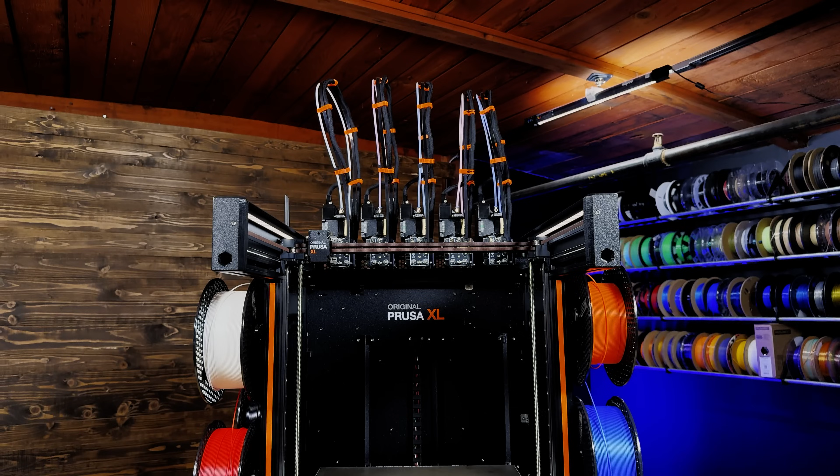This is the Prusa XL, a monstrous 5-tooled machine with an equally monstrous price tag. Is it worth it? Let's find out. First, I want to let you know I bought this machine.

It's finally Friday. It's finally a beautiful Friday.

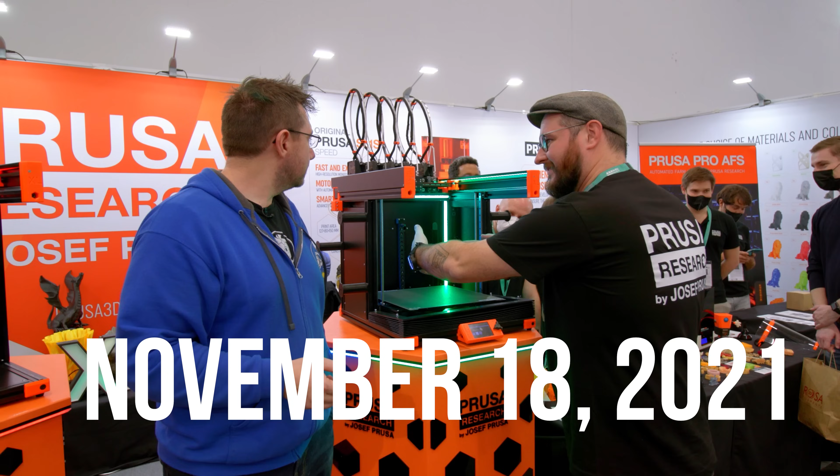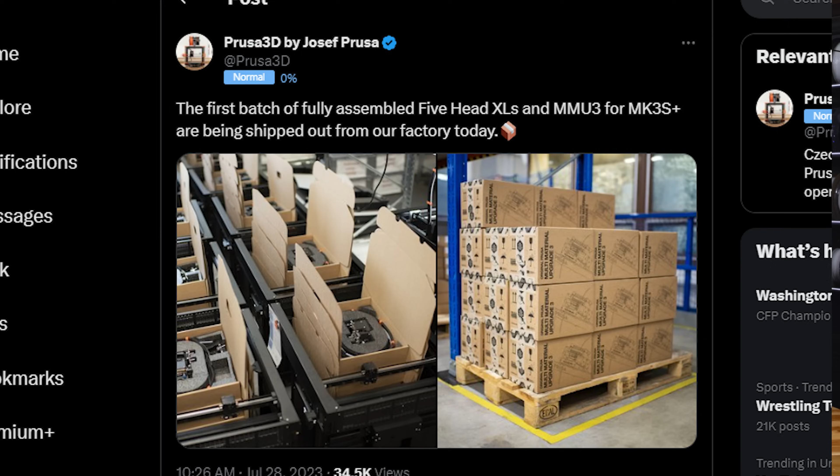I was one of the pre-orders when the Prusa XL was announced, November 18th, 2021, so many years ago. And then the wait. One eternity later. And then the shipping announcements. There's actually a tweet. He talked about the shipping announcements because it was right around the time that the LTX Expo was happening in Vancouver, Canada, with the 5-headed Prusa XL now shipping, and me being someone who put forth $4,000 to pay for the 5-headed machine.

I thought, the 5-headed machine I've paid for will be within driving distance of my house. Why don't I just propose taking the one from LTX as my pre-order? I shot my shot. There's no one guarding the Prusa booth. There's no one guarding the 5-headed XL. So I have an idea. I'm gonna steal it. And then this happened. Remember when I talked about stealing that?

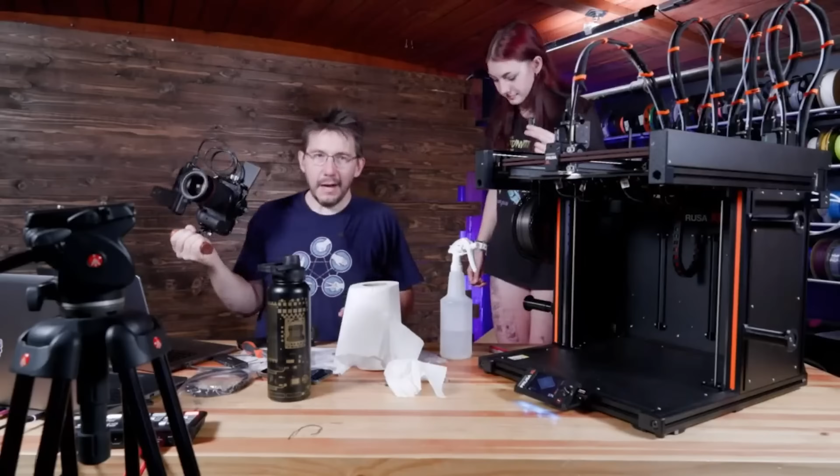And I thought I needed a good excuse to get it out of the box. And it was my birthday. So what I did is what anybody in my position would do: have a freaking birthday stream getting the XL out of the box and hopefully printing its first print for me. I think at this point we're gonna call it good because we've taken it out of the box, put it all together. We've verified that it can print.

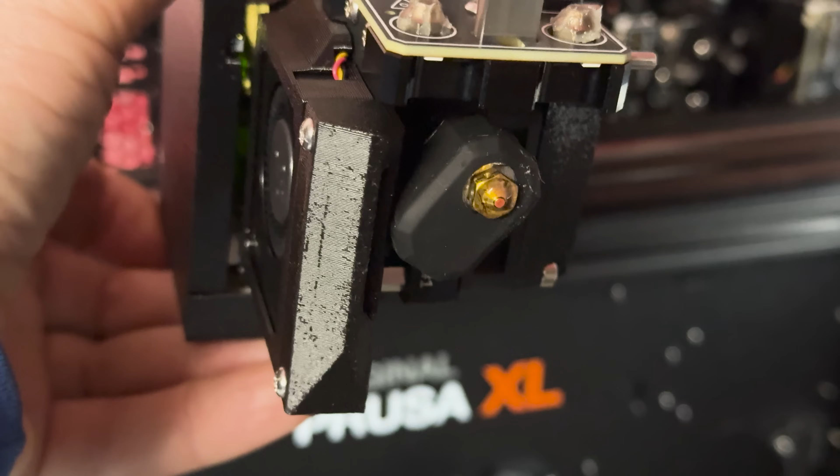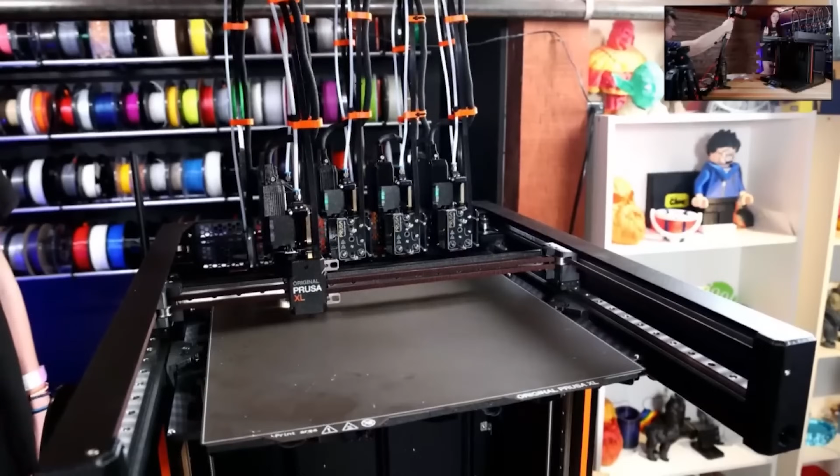The XL does have 5 heads, and on each head is a 0.4 millimeter nozzle, and above that is a Prusa Nextruder, because this utilizes those new nozzles that Prusa and team have come up with that are compatible with their Nextruder system. Each nozzle goes to 290 degrees C. As far as the bed goes, there are 16 individual heat bed segments that each go to 120 C. Auto bed leveling is done via nozzle tap thanks to that Nextruder, and it's a 360 cubed build volume.

The motion system is CoreXY, which is a wonderful motion system for a machine like this, and they didn't put that bar up front, which means I didn't have to use my angle grinder. Now with 5 tools, 5 colors, 5 filaments, you might be talking about the waste product when doing multicolor or multi-material prints. And I have to tell you, it's far, far less than when sending all material through a single nozzle.

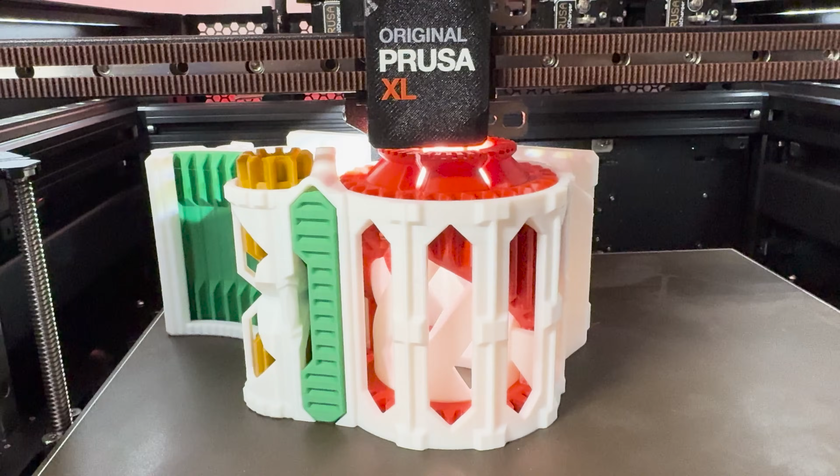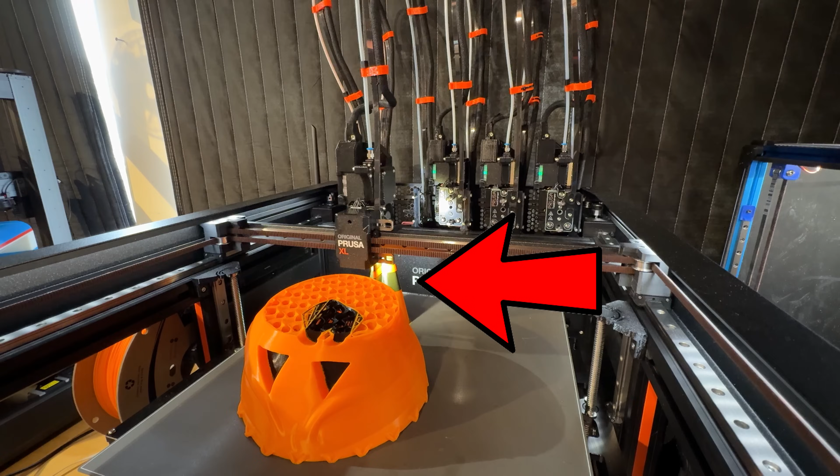If you're printing with nozzle 1 and it has to go back here and get the second one to bring it out, it's not going to be primed. The pressure's not going to be appropriate. So what it does is it brings it to a purge tower and it just gets it ready. And it uses a very minuscule amount of filament to do this. And then once it's ready, it quickly moves into place and continues printing.

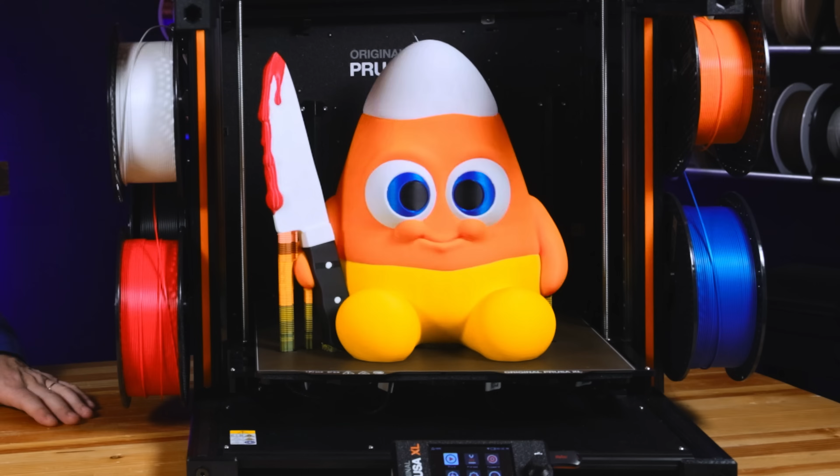It couldn't be a review without some prints, and we've got one print over there that we'll get to in just a little bit. First prints on this machine were actually during the live stream, and I did this little design on the bed. I have since thrown that away.

I utilized the XL for a print farm project, where I made this case for Crate 3D, medium cheddar. I used my print farm behind me, but also my XL to make a bunch of these red pieces. It did make quality pieces that fit with everything. It is a little furry, but thankfully the Hacksmith has a tool. I can clean those right up.

I also used the XL for this project with Dangling Carrot Creative. They were making this incredible haunted garden down in California, and it was to benefit the tradespeople that worked in Hollywood during the strikes. And we made a lot of these little tiny dangling carrots, and I used my Bambu print farm for that, but this really, really big carrot wasn't gonna fit on those build plates.

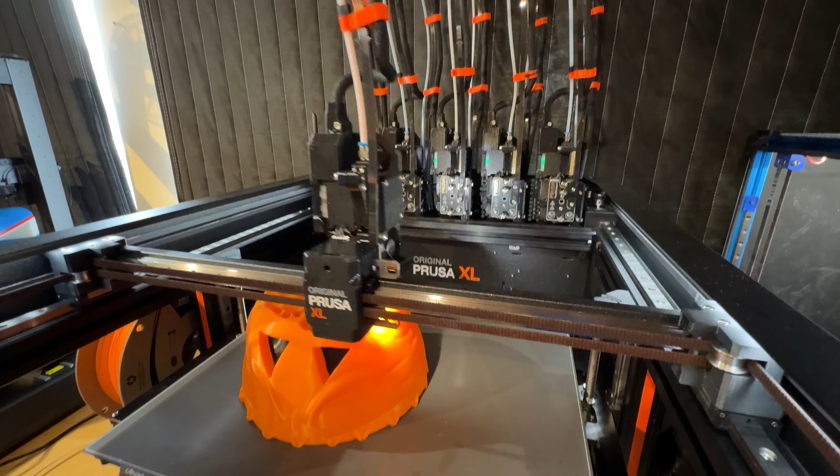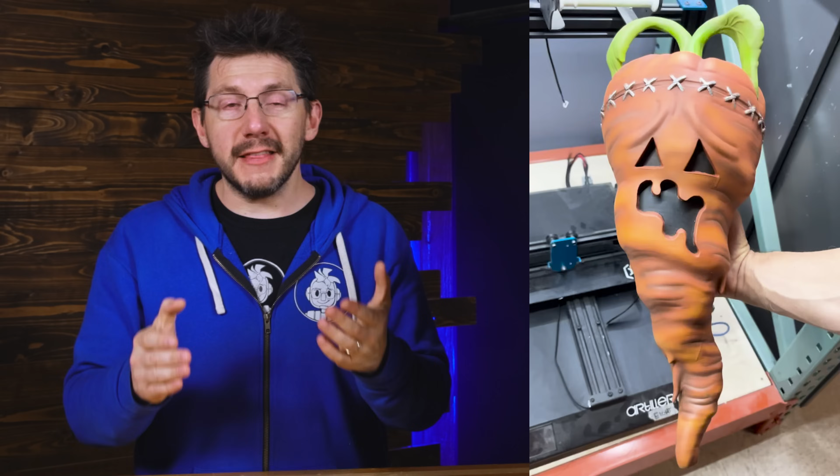So I made this incredibly large carrot in black, orange, and green on the Prusa XL in Polymaker materials. And I remember thinking to myself, this is the smoothest thing I've ever printed. And I can't show it to you because I delivered it to Dangling Carrot in person and they loved it. They absolutely loved it. In fact, they painted it and it looks absolutely amazing. This skull tome from Clockspring 3D was printed on the XL.

It's a functional print because I use it to store some of the bits and bobs that come with the machine. But at the end of the day, it looks fantastic. I actually made a YouTube short about this and it looks good. The gold up front is just otherworldly. It doesn't even look printed, and that's Golden Winter from Printed Solid, one of my favorite materials that's not High Five Blue.

I also made this football looking vase or urn, as people on social media have said they think it is. This is a Clockspring design and it's printed on the Prusa XL in a bunch of different colors. Courtney from Filament Stories and Sven who is Clockspring 3D actually came to visit, and I said, what should I print on this machine that's a model of yours? And he suggested this. We just printed it, and it's a big vase.

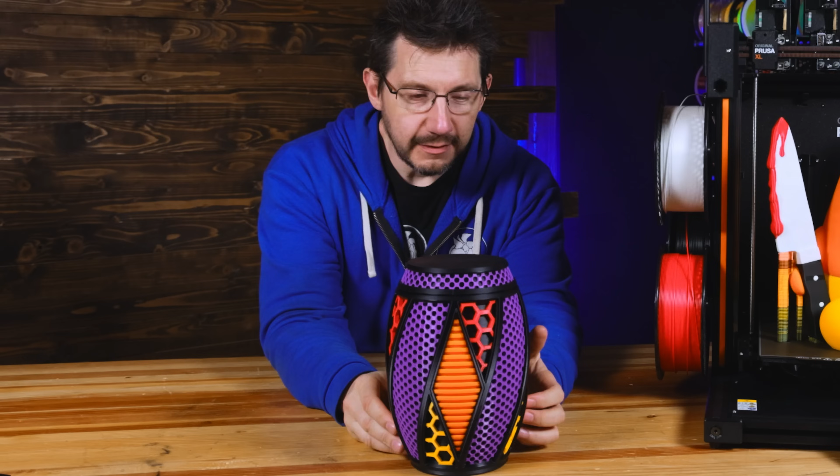Some people said it's an urn. Some people said it looks like a football. But either way, I do think the XL did a great job with this. I think that it came through and reproduced in a way that just looks fascinating.

I did have to put that Golden Winter back on the machine to make this freaking awesome flexi dinosaur. Look at that. Rah, rah, rah. Oh, I love this. Oh, I'm tired.

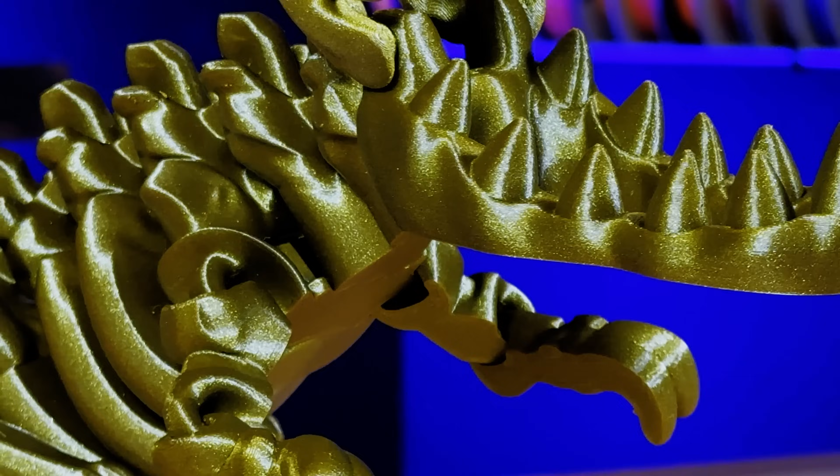So this was printed on the XL in Printed Solid's Golden Winter, one of my favorite materials. And the quality on this is out of this world. It actually boggles my mind how great the machine was able to reproduce this model. It looks absolutely stunning.

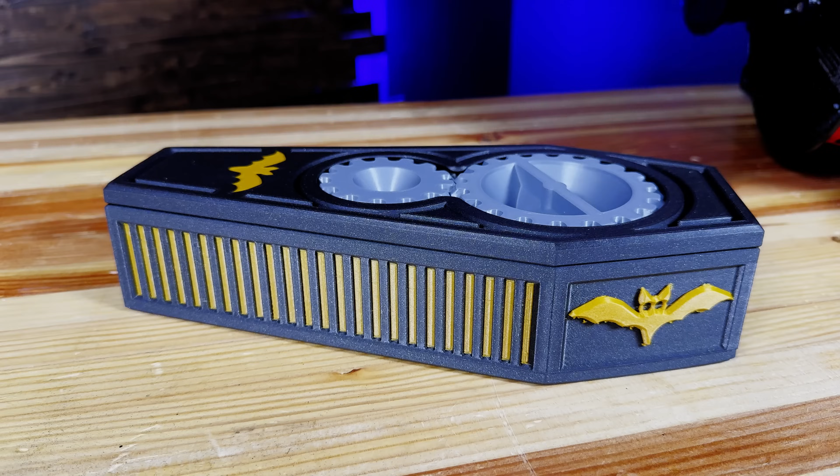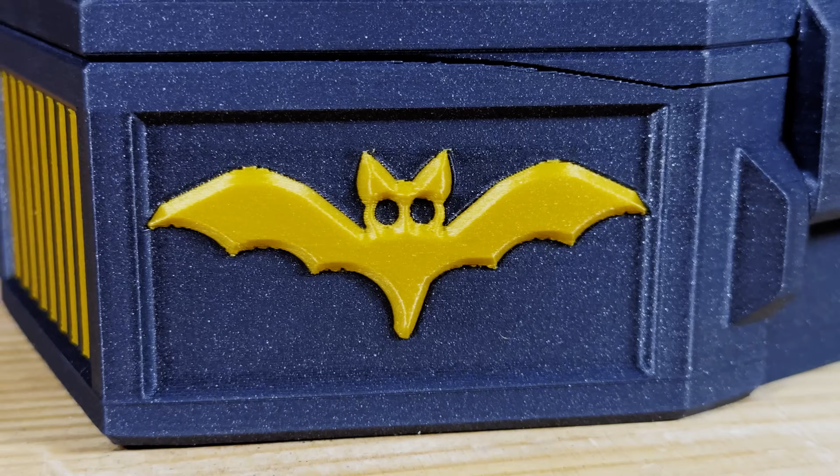You know, I did print a coffin. It's full of some stuff, and it just sort of seals together like that. The machine did a good job making this. I think what happened with this, because you can see that the bat figurine on this side doesn't look as good as it could. And being a multi-material model, I think this one was offset more outside of the model than this one is, because this one looks just fine.

And here's what's really cool. When we talk about waste products in 3D printing, that's the purge tower. It got a little squirrely there, but you know what? This is a waste piece, and so it doesn't matter how this looks. This could look horrendous and still be successful, just like me.

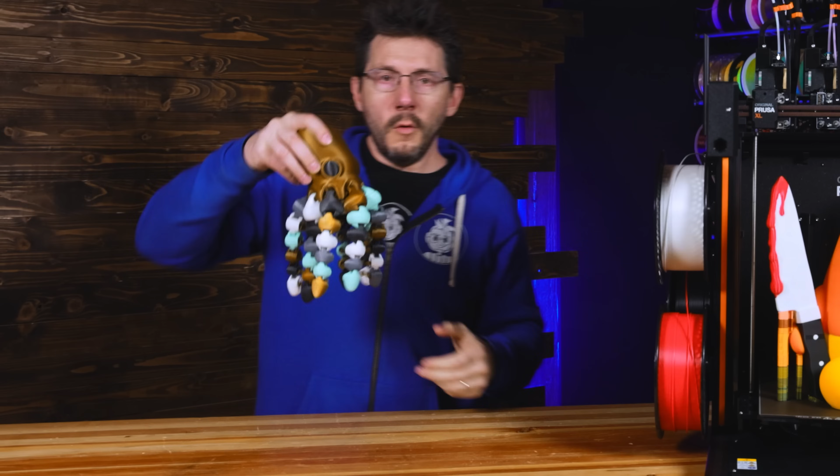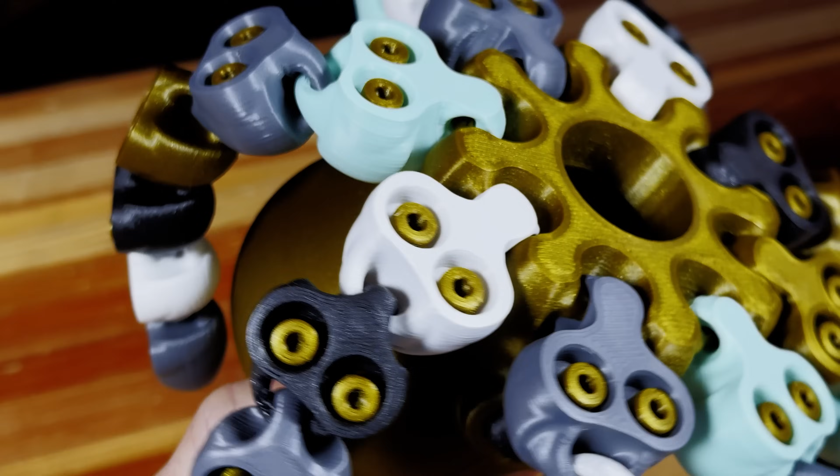One thing that was fun to print was that octopus. There are some issues with the materials. This light blue, it was old and I think a bit out of spec. The gold here, I do love it, and it looks out of this world. It looks stellar. One of the things that I thought really is cool about this is all of the little suckers on the bottom of the arms. They're all individual pieces. This shows you how tough of a model this is.

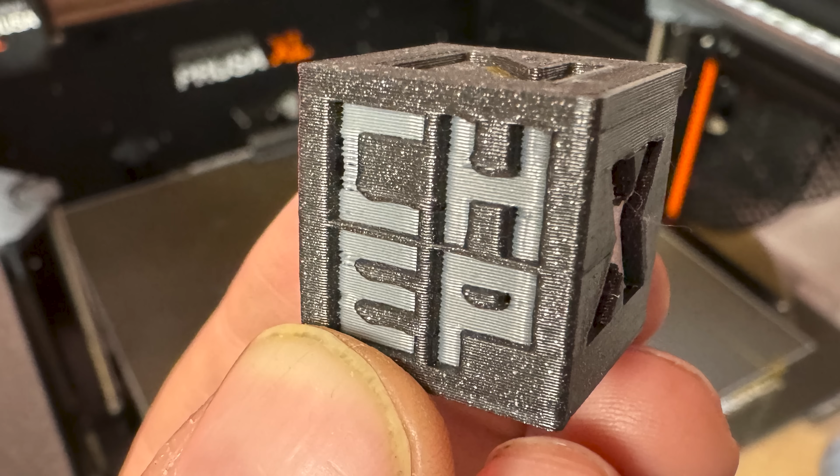I do need to work on seam placement. Apparently that's a skill I still need to learn, because it could have been placed in the back, but instead it's right there. So you know what? I still love him.

Well, you know, I also printed a CHEP cube, a multicolored CHEP cube. I love CHEP, and it's a cube. Why not? You know, I also printed this Merry Christmas sign from Fix'em Dude, and it looks really cool. I did the Hedamame updates on my XL. I printed the parts for those, and they look fantastic as well. And you know, they sound good too.

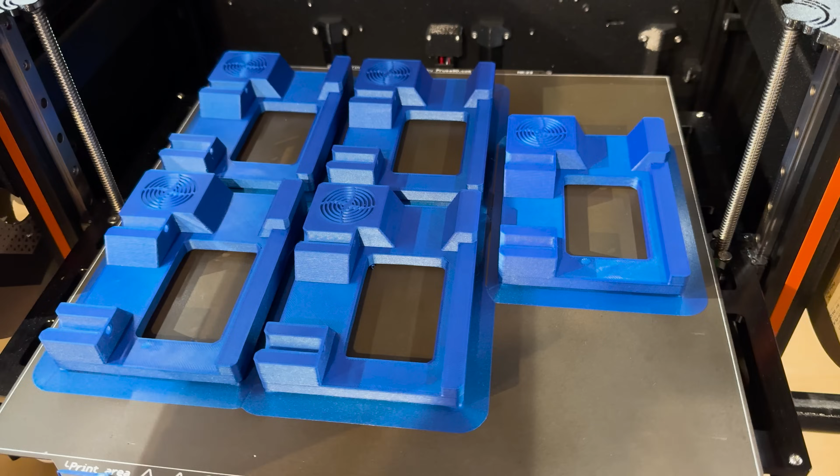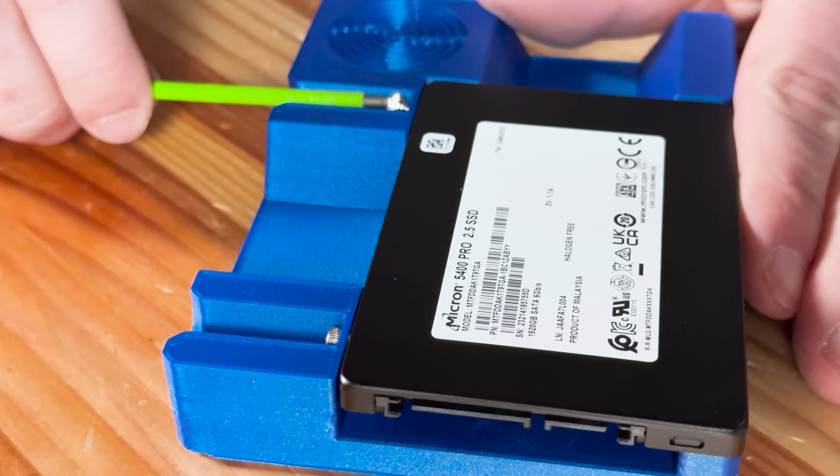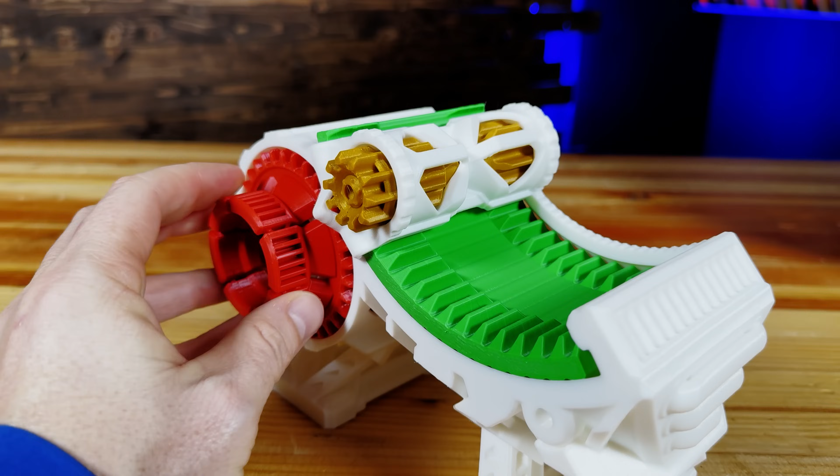Don't forget, 45 Drives utilizes 3D printing in their production, and I upgraded the parts in my HL15 storage server to a much better color. The SSD caddies were printed in High Five Blue PLA. And how could I forget half a build plate full of these little red boots? I gave them out at our family Christmas gathering. They were a hit.

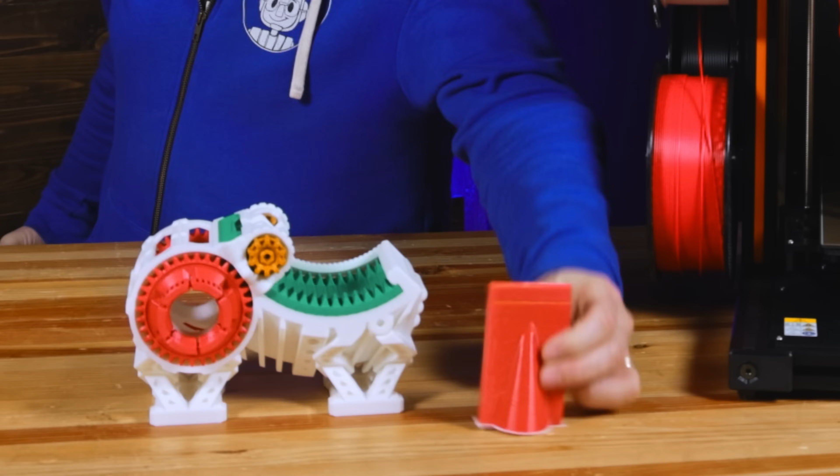There's this model by Clockspring that came out really fun. So you get to store your stuff in there, and then you can close it down. And it just looks kind of neat. And the reason I want to talk about this one first is because that's the wipe tower. Again, not that much, but that wasn't the first time I printed it. I don't think it's necessarily something that's wrong with the XL. I just think it's a really tough print that needed a little bit of assistance.

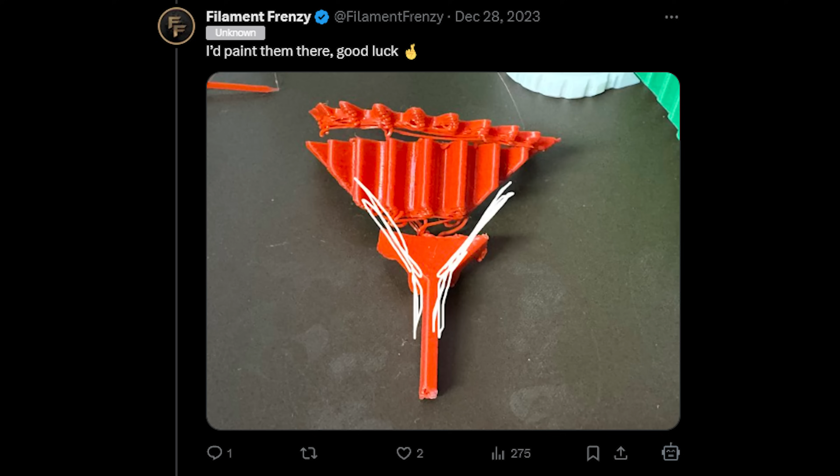I posted about this online. Filament Frenzy actually made a suggestion, so thanks, Tom. I do appreciate that. There's a tiny, tiny post, and that has to print like this. So it's pointing straight up. It has to go tall and then build off of it like that. And it fell down. I switched to a different red, and it still fell down.

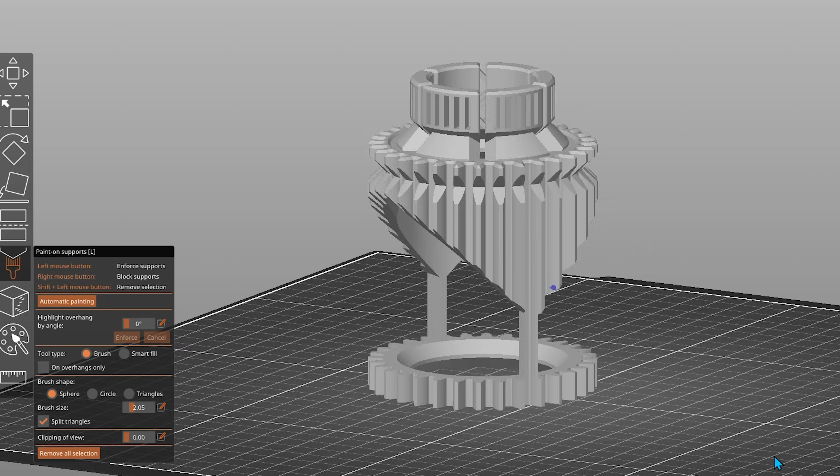So what I did is utilized a suggestion from Tom. I was thinking about doing supports, and he said just do it, but add a little bit. So I was able to paint on just a little bit on the model. I tried organic supports or tree supports, thinking that it would just kind of grow into where it needs to be. That doesn't work in PrusaSlicer yet.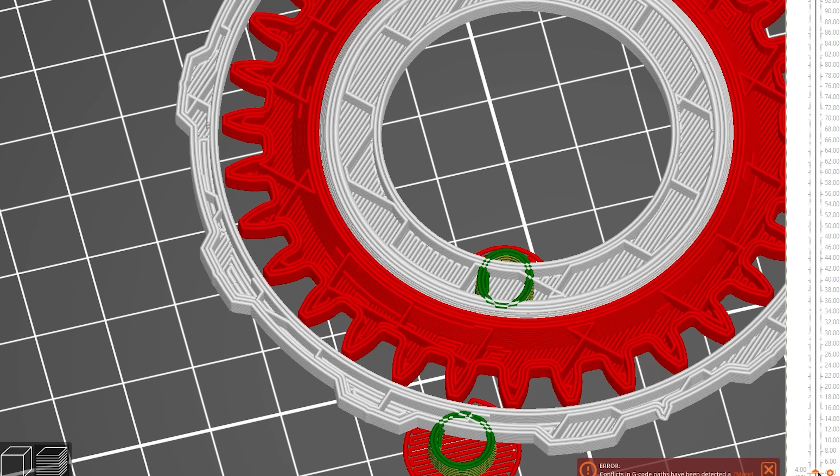The software doesn't take into account multiple separate geometries when computing the path for tree supports. And so the tree supports for Model A will sometimes grow through Model B. I would imagine, being software, that's something that they'll solve in the future. But until then, what should I hide in here?

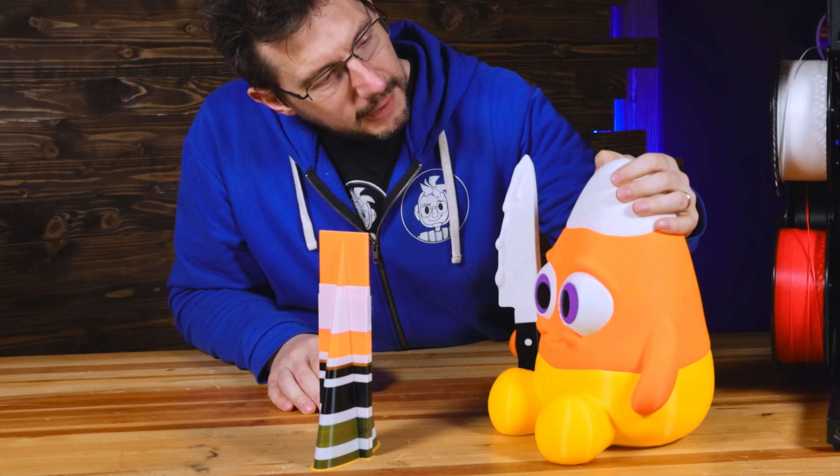Now it's time to talk about this. This is the Murder Corn, and this is by Chelsea from Chaos Core Tech, or Chelsea Creates Things. It's over on Thangs, and it's a really good model. So what I did was take the model into Prusa Slicer and paint it myself. I assigned the 5 different colors to the 5 different areas that I wanted printed, and then I sliced it up. My painting wasn't perfect though, because you can see some artifacting on the eyes.

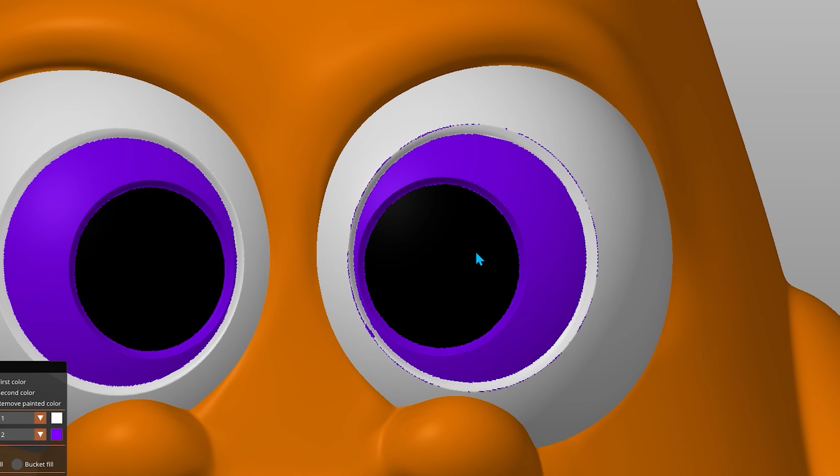And those artifacts are there because, one, when I was doing the digital painting process, I just missed them, and we all miss things from time to time, but also Prusa Slicer is missing a feature that Bambu Studio has, and that's gap fill. In Bambu Studio, you can adjust the gap fill to take care of little missed triangles that appear. So I'm hoping that gets backported over to Prusa Slicer, and we have a painting experience in Prusa Slicer that has that gap fill.

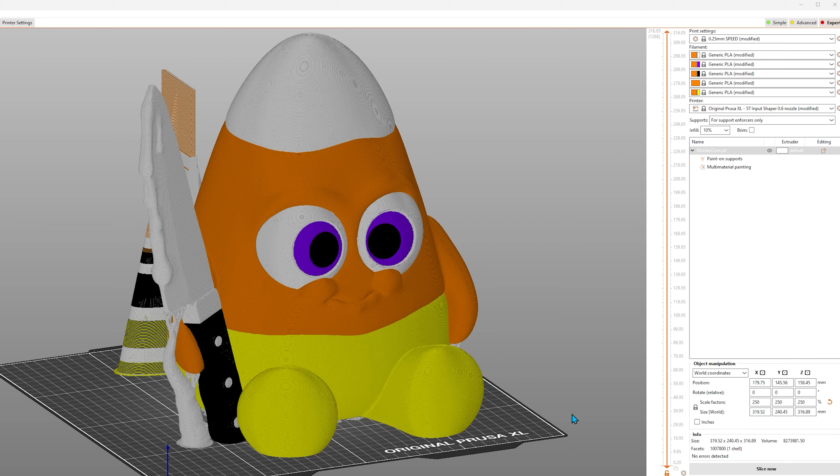So my painting wasn't perfect, and I realized that a murder corn should have blood on their knife. So I set out to do the impossible: 6 colors on a 5-tool machine. But how? Well, within Prusa Slicer, you do have the ability to insert an M600 command, which is the command to tell the printer to stop because you want to swap filaments. I don't need yellow until we get to that height, right? Yellow only goes to right there, and then I can swap out yellow for another color, put red on the knife, but still make the eyes a different color.

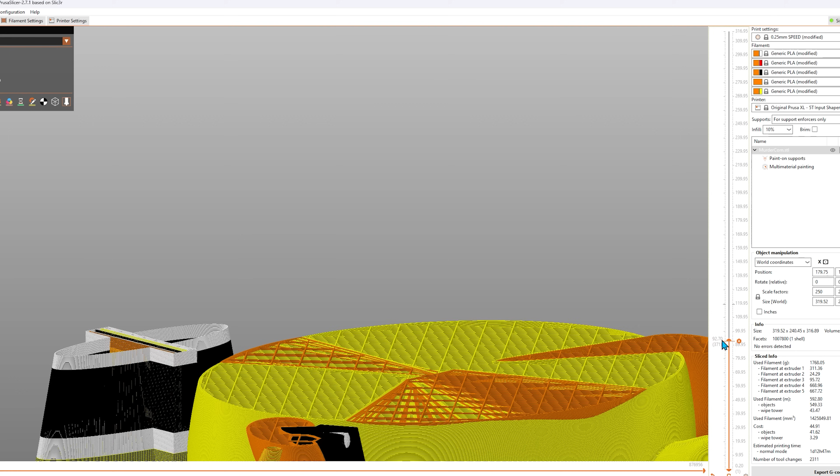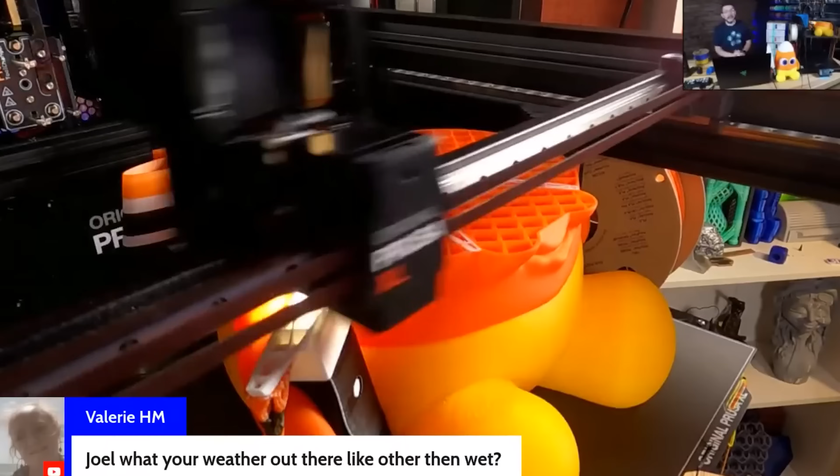Yeah, let's do that. So within Prusa Slicer, I was a little hacker man, I colored it appropriately, put in the color change at the right level, and I thought, send it! It was time to live stream, and I thought this would be great because I could show people how the M600 command lets you get more than 5 colors out of a 5-headed machine. And it got to that point, and it paused, and then sadness, because the M600 command didn't know which extruder I wanted to change the filament on. It just went forth with, I believe, extruder 1. And I thought, well, this isn't optimal.

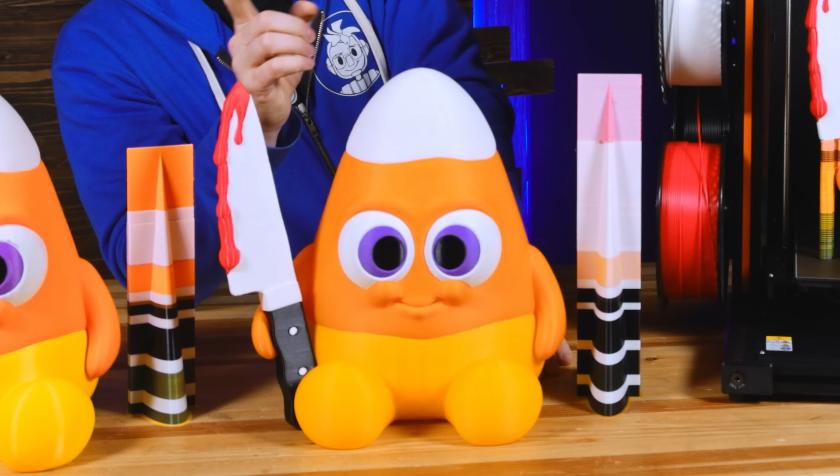So at the time, I snipped the filament, and then waited till it got to that point where it needed it, and it was out. Oh, look at that. Yay! So I manually introduced a filament runout, which paused the proper extruder, and I was able to pull it out, put the right filament in, and print it out. And it made this. Look at that. There's the purge tower for that one. Purple eyes, red on the knife, and 6 colors: yellow, orange, white, black, purple, red. Finally, I had the Chelsea murder corn exactly how I wanted it.

But the issue was the Prusa XL was not behaving. If you look at the white sections, they are beyond inconsistent. For some reason, whatever extruder had the white, it was not doing a good job. I can fix this. I worked with Shane at Prusa. Love you, Shane. 1440 Makers, what's up?

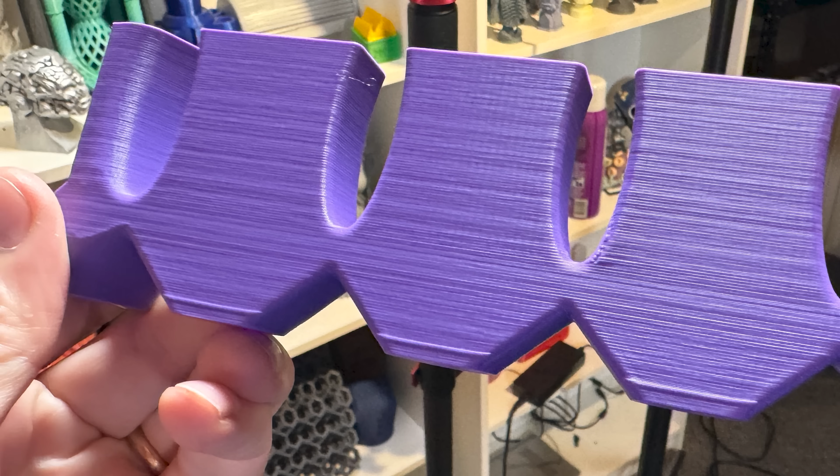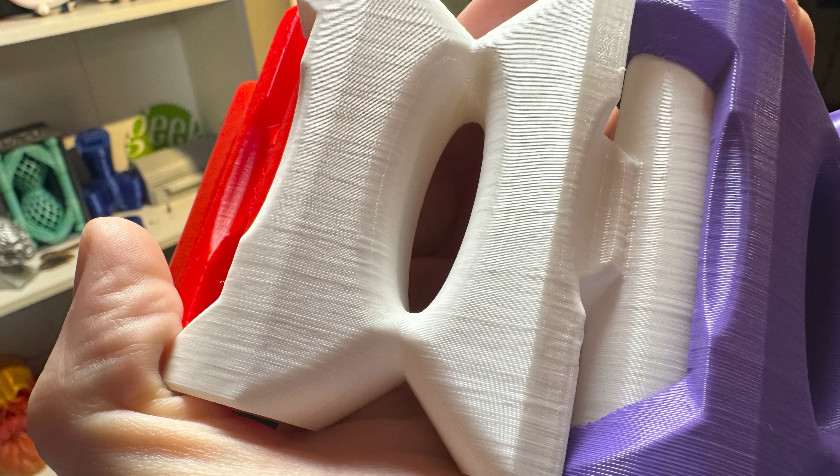We started going over different materials and different extruders in the Prusa machine. So you could see that the purple didn't look good. Red did though, white did not. Well, let's swap around the colors in the extruders and see what happens. Red looks good here, white's good here. Wait, no, white doesn't look good there. It still wasn't perfect. And we did more test prints and more test prints, and some stuff looks just awful. I found what I think was the solution because I got a black piece that looks good, another purple piece that looked good, and a white piece with this white filament that looked good.

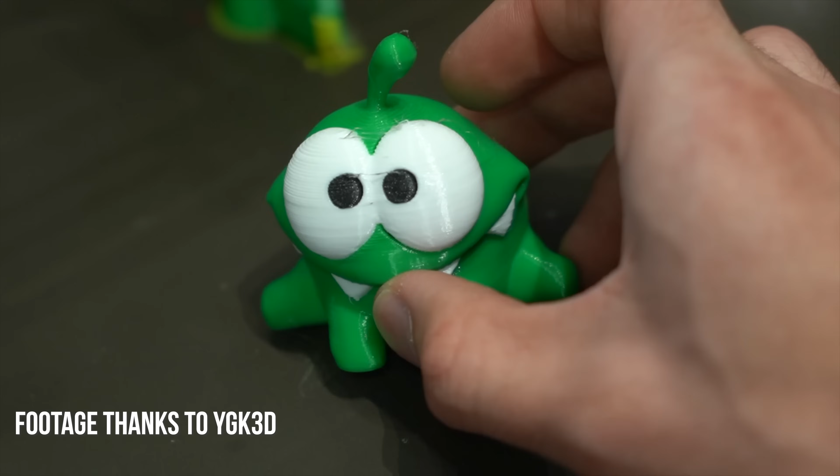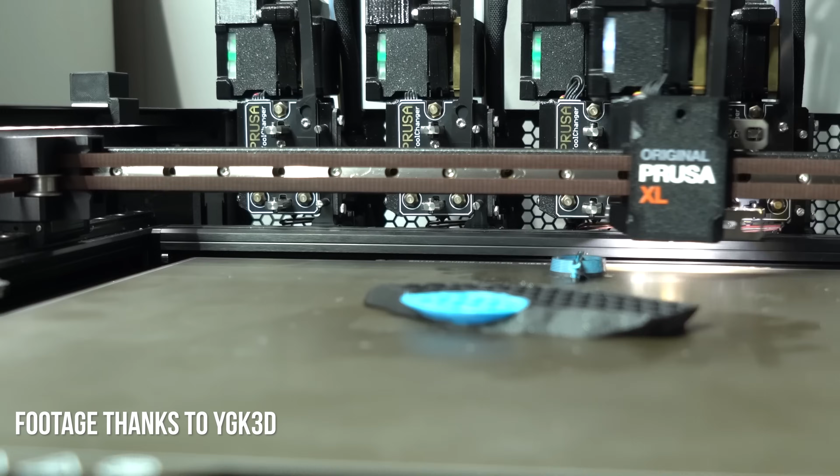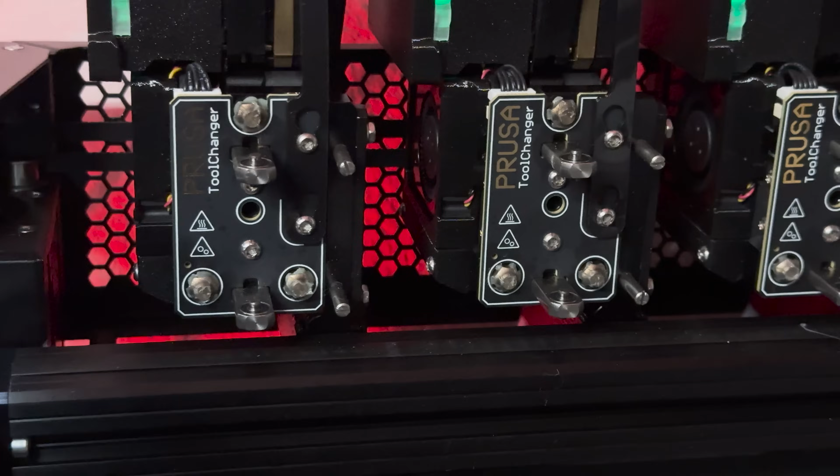I had originally thought maybe my problem was the same problem that YGK 3D had and made a video about, where he had to 3D print a small piece, put it on his XL, and then add a couple G-code commands so that every time it went to switch heads, it would bump that head against that piece. And I thought, well, Shane, maybe I have to print the part and add the G-code. That just didn't sit right with me. And so Shane said, you need to lubricate. They have since released a blog post on this, but essentially these 3 different rounded screw heads on the printer fit into the back of this carriage.

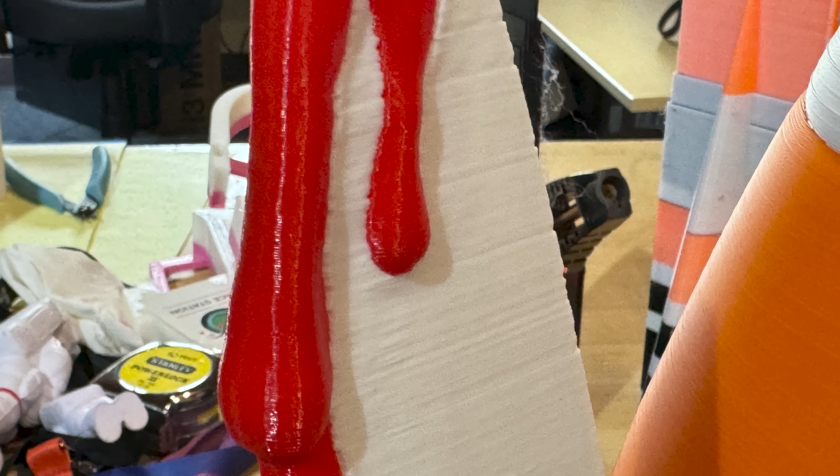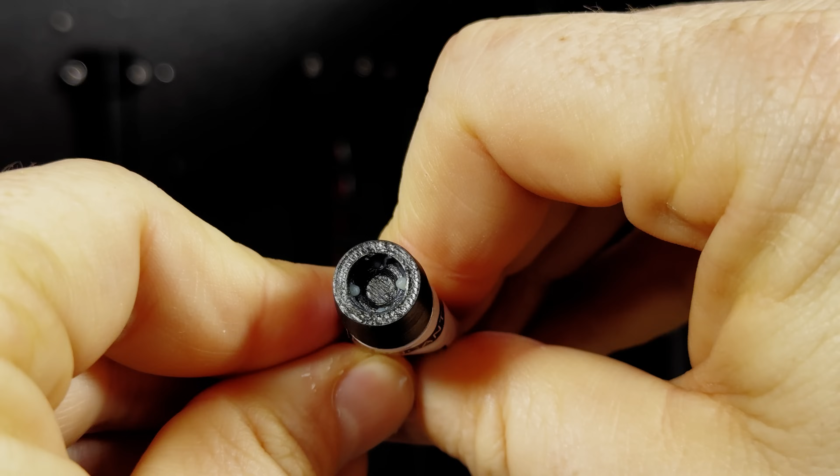When it goes to pick them up, if it's just slightly off without lubrication, friction can impact it, and being held slightly off by friction is what created all of these terrible layer inconsistencies. So I 3D printed this little lube adapter that Prusa had made, which took 10 minutes on the machine, and I attached it to the bottle of lube and started lubricating each of those rounded bolts.

Now I finally have a fully functioning battle station here to make my dreams come true and get a 6-color murder cone done. Let's get it off and take a look. All right, here we go. Oh, well.

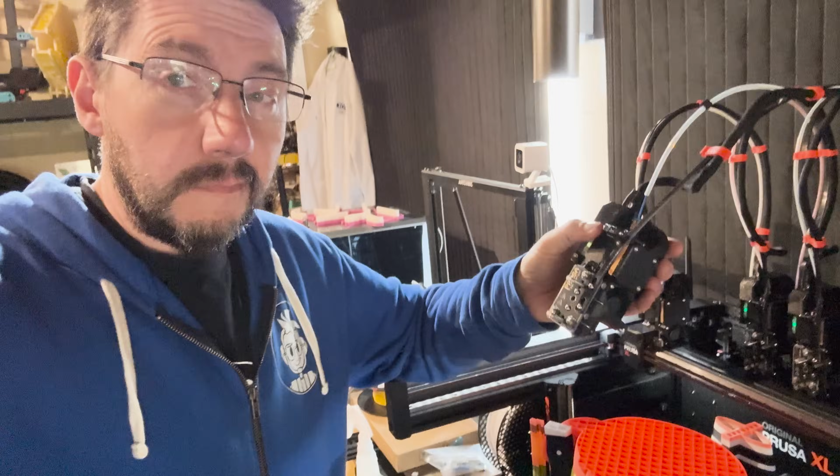If we take a look at this, it's still not exactly what I'm hoping to get out of this machine with regard to this model. During the print process, I was told that M600 was fixed in the latest firmware I had installed on the machine. And when it got to that point, well, have a look. M600 worked to pause the machine, but it won't allow me to choose extruder 5 to change the color.

I'm recording from my phone here. I just came in to change the color. I had to manually heat extruder 5, manually remove the filament, then snake in the new filament, push it through, and get it to purge a little bit. So that's where I'm at right now. But if you can see, I've got blue filament in there, and this should continue.

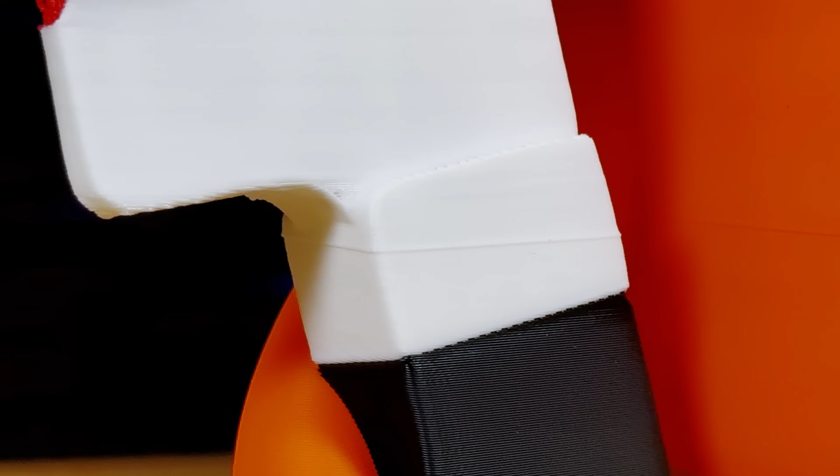Fingers crossed. Without M600 working properly for me, what I had to do was manually remove the filament from the extruder, which actually wasn't that hard, back it out, put new material in, make sure it purged, and then take that purge off when it starts the print, and then it actually continued. Where it happened is right here, and unfortunately, there was a layer shift.

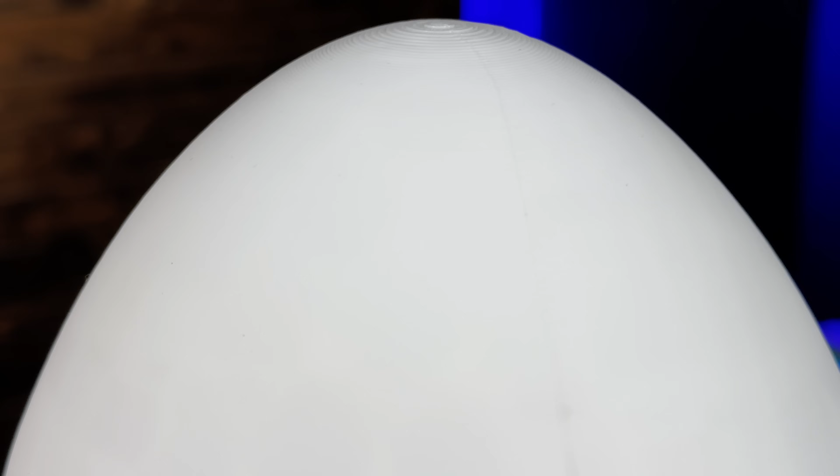The layers look better, so everything in white here looks better. Again, I still have to figure out how to do seams, apparently. Like the white's good, the orange is good, yellow's good, black's good, the red's good. Like the blood looks fantastic on the knife. And I gave him blue eyes.

Why not? The bottom here, I did add supports. You could see them on the build plate, but for some reason, that level of overhang is just not something that printer is going to do well. Now, it could be that it's a 0.6 millimeter nozzle at 0.25 millimeter layer height. That's a lot of plastic coming out for it to be able to cool. It may require a smaller layer height or a smaller nozzle orifice in order to print properly, but that's something I'll have to look into.

I'm like 95% happy with this. 95%. That's not bad, but I know we can do better, I know this can do better, and I want to do better. This is $4,000. I paid $4,000 for this plus shipping, and it comes assembled.

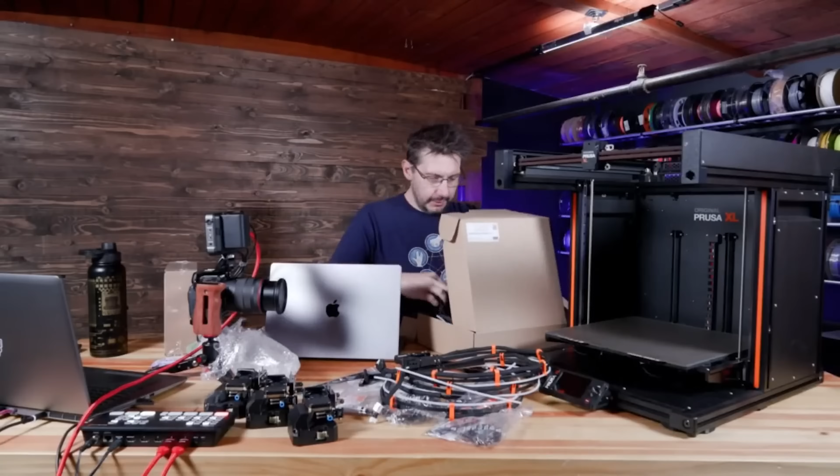But I put quotes around assembled because they can't ship it exactly like this. It would introduce an incredible number of errors. So all of the tools are not attached. They come in their own boxes, and then you plug them in and go through a set of calibration. It takes a couple hours to do if you're doing it properly, so I had to do that. It's not assembled in that you get to take it out of the box and hit go. It's assembled mostly, like the frame, the electronics, the motion system are all put together. And as people who have gotten the Prusa XL kit have experienced, it does take a while to build this. So with that not needing to be built in the quote unquote assembled version, you do save yourself a lot of time, but there is still time that needs to be taken in order to get this properly set up and printing.

A lot of people really don't like this $4,000 price tag, and they say it's overpriced, and it's not. It's absolutely not, and here's why.

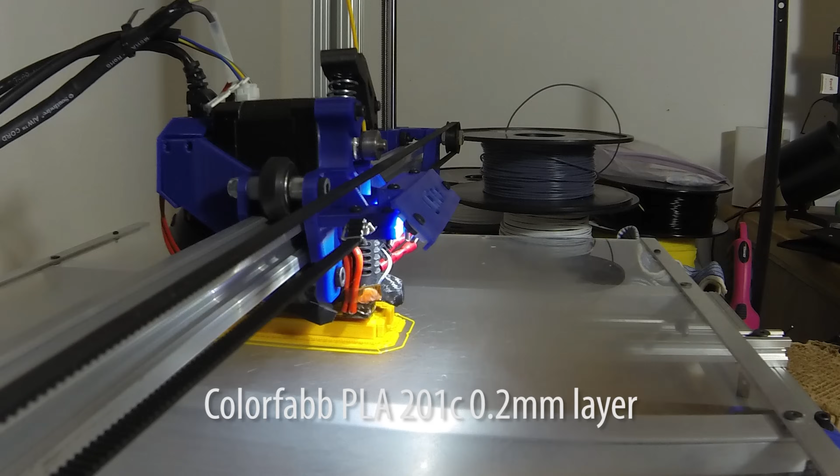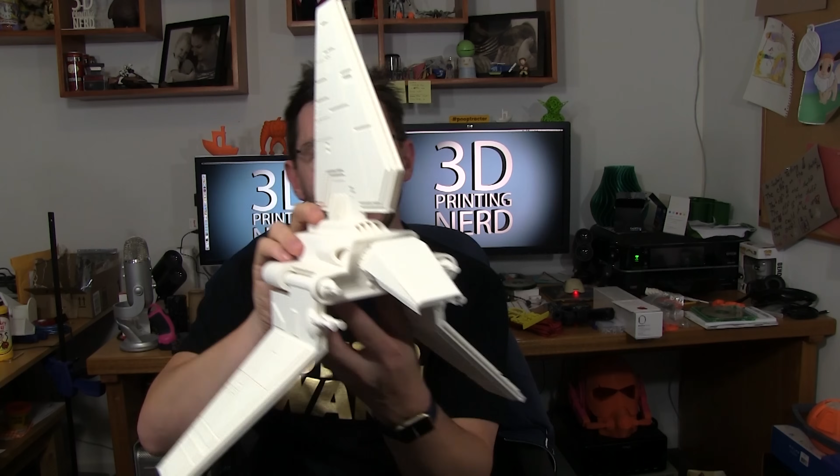Back in 2015, my little channel was starting out, and I reached out to G-Create and purchased a G-Max 3D printer. It took 6.5 weeks to get to me, and I paid $1,999. It was awesome, freaking awesome. I used it to print all sorts of massive things. Talk about a throwback, that G-Max printer is what printed the 400% hairy lion. I remember working with the designer to make the hairs specifically sized so it could be scaled up properly. That was printed on my G-Max 3D printer.

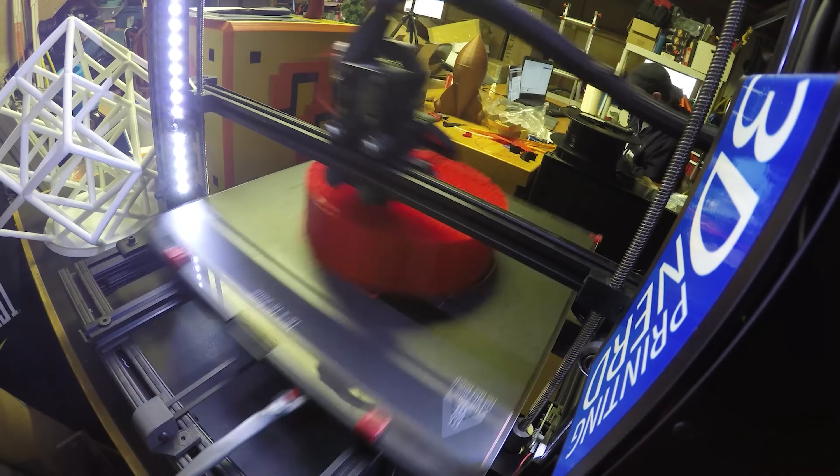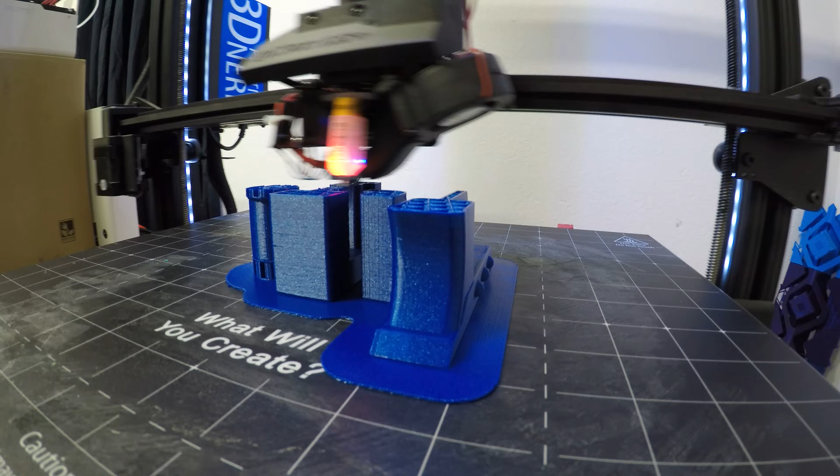So was the G-Max actually worth the $2,000 at the time? Yes, absolutely 100% yes. It was the largest large format 3D printer offered at the time by a company that offered a warranty and support. It was a product sold by a company to consumers. It was the only one at the time of that size.

So yes, it was absolutely worth $1,999. Being the only one of that size at the time means that when I purchased it, I was an early adopter. And anytime you're an early adopter of technology, you pay a premium to acquire the thing. So as an early adopter, I did pay the premium. I paid the $1,999 plus shipping to get the thing, but I had the thing.

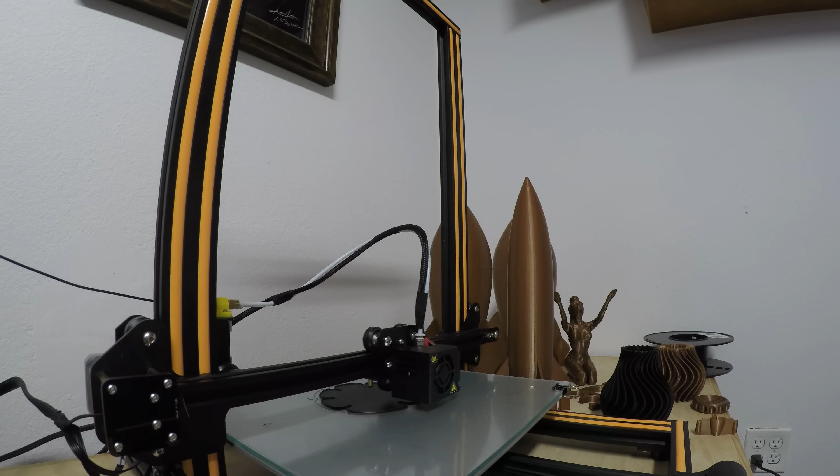But then sometime later, a little company you might know as Creality came out with the CR10. And it sold like hotcakes because it democratized that size for consumer 3D printing. It cost nearly nothing compared to the G-Max for something similarly sized. That CR10 100% changed the game for large format 3D printing. It wasn't built like a G-Max 3D printer, but it sure could print like one.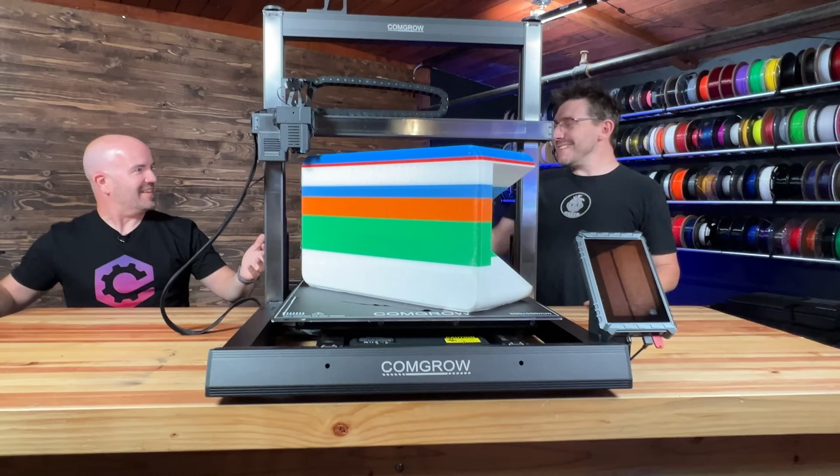That $1,999 that I paid in 2015 for the G-Max 3D printer, now with the CR10 released, is it worth it? No. And now, not just the CR10 and its variants, now we have things like the Kobra 2 Max, or the Neptune 4 Max, or the T500 from Comgrow. All very large build volumes, and all below $1,000.

So for Prusa and the Prusa XL, they 100% can charge $4,000 for this machine because it's the only one that exists. The XL exists in a class all by itself. It's produced by a company and warranted and supported by that company. It's not perfect, but most of the problems that I've had with this machine are software related. And because it's a product offered by a company that supports it and warranties it, it can support it with future firmware updates that can solve issues, fix problems, and make it speedier with input shaping.

All of that available via software. I know I've showcased models that have had issues, but I've also had amazing models that look breathtaking, that look smooth, that look perfect, that look nearly injection molded. So will it always be worth $4,000 for this machine?

No, it won't, because down the road there will be companies that make tool changer platforms similar to this, or better than this, that make build volumes similar to this, and then charge much, much less. When that happens, that $4,000 price tag for the Prusa XL is going to be much, much harder to justify. And I say that as an owner.